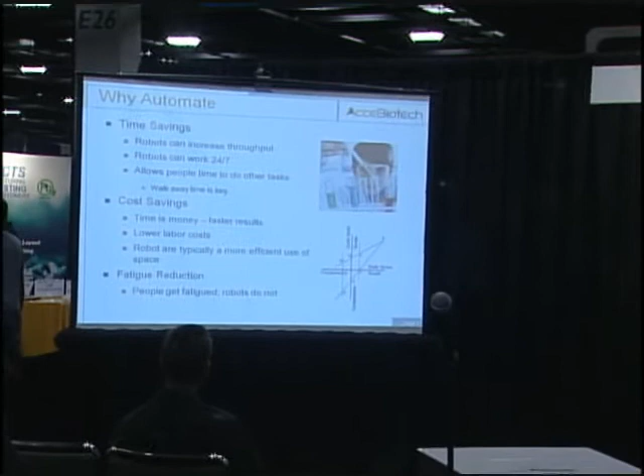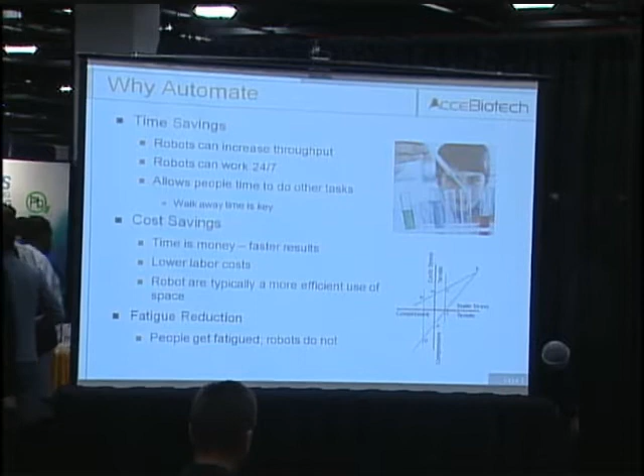And then in some areas, especially in research and development, it enables you to do other tasks rather than just doing simple mundane things. Obviously, time is money, cost savings, like I said. And then also the space. They're actually a very efficient use of space. They don't need a kitchen, they don't need a bathroom, and they can be very compact. In a lot of areas, fatigue reduction is a very important aspect of automation. We actually have one case example where that was one of the driving factors.

Another area is consistency and quality. If you want something that's very delicate, like injection into GC mass spectrometers, which used to be very delicate and user specific, if you want good consistency, sometimes robotics is very important. Also timing: in microplate dispensing, the timing of that process can be very critical, so automation can solve that problem. Dispensing of epoxies is another area. And then obviously special environments. You may be working in a biohazard lab or in a lab that has special chemicals, so a robot can also solve some of those problems.

So specifically talking about R&D, some of the types of robots that are used are typically Cartesian or SCARA robots. This is a picture up here of one of our robots, an XYZ robot. A SCARA robot works more like your arm, essentially a rotational, linear type application. There's also some high-end microplate automation that is really beneficial for high throughput screening or different types of chemistry applications. And this shows a Douglas system, which can run about 100 microplates a day.

So essentially, in R&D, you're typically using off-the-shelf automation. You're not customizing. You may have to customize a small amount because of the specialty of the application, but usually you're looking for a really quick return on investment, getting the automation in and running right away to help with your research and development. And you really don't want to spend a lot of time with custom equipment. So that's what we'll focus a little bit on today.

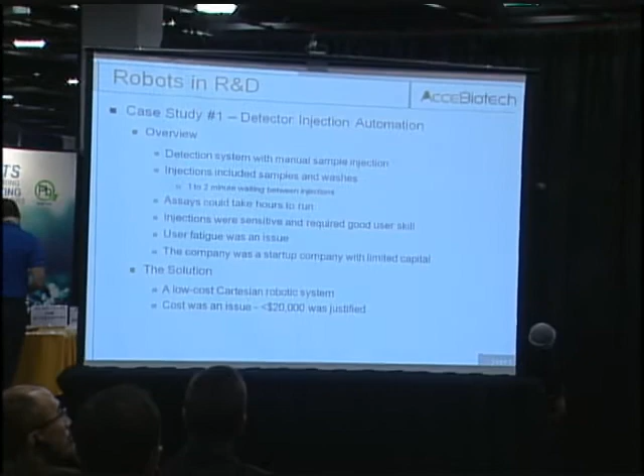So the first case study we have up here is a system used for detector injection. Basically this company was injecting a sample into a detector. And there were problems with that system in the sense that the injection samples were very time consuming, and they came at a frequency that wasn't easy for the user. Every 1 to 2 minutes you had to inject, and that timing was somewhat critical. So you'd stand around for 1 or 2 minutes and then inject, and then stand around for 1 or 2 minutes and inject. So you wasted a lot of time.

And because it was tedious to do, automation was a great possible solution. The only thing is the company had a limited amount of capital. They didn't want to go out and spend $60,000, and it really didn't pay back. So what we ended up doing is coming up with a low-cost Cartesian robot. How we were able to accomplish that is we bought a used Biotech system, which is a standard microplate robot, up here in the right-hand corner. And essentially we did some simple modifications to allow the upfront automation.

And you know, the system was purchased for $3,000 on eBay. If you were to go out to buy a new one, it'd probably be $40,000 to $60,000. But it worked out really nice because we were able to get the system in real quick, get it up and running, and get the simple process automated.

So the outcome is basically the assays are being performed by the machine rather than the scientist. So the scientist is able to do a lot of analysis and other higher level work, while the automation is done by the robot. The actual results are more accurate or consistent. The timing is pretty much precise. And then the interface to the injection system is also controlled, so they're getting a lot better results.

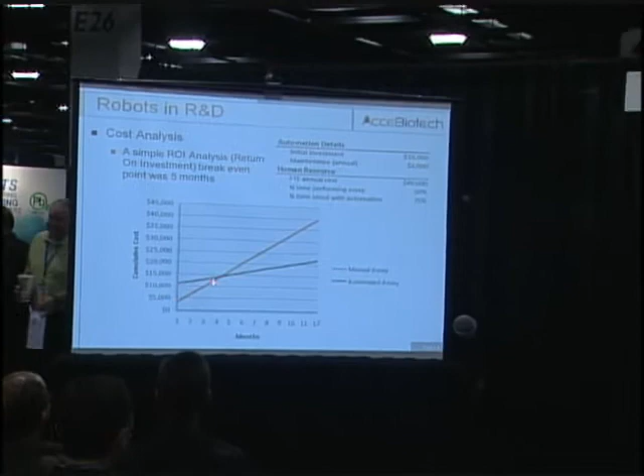So if you plot over time, this being months, the black line essentially is the initial investment of $12,000, but the amount of expenditure every month was reduced because less labor was used for that test. Essentially, this line here is just without automation, so every month you keep paying more and more for this person to continue to do the experimentation. So the crossover point ends up being about 5 months, so it was a pretty quick payback.

Now, if you ended up spending $60,000 up front, the payback would be way out here. It may not pay off, but using this creative solution of actually buying something off the internet and getting it up and going was a real good way for somebody to get up to speed.

So some of the creative approaches that you can use in R&D: one thing is I'm a real big fan of Craigslist and eBay. Like I said, we bought that robot there. When you buy a complex robot, there's usually sometimes a month or 2 month delay. With eBay, you can get it in a week or so.

Now, there is a risk that it may not work, but you also have the risk if you buy a really expensive robot and try and automate your R&D process, it still may not work. So with the small investment that you have, I think it's worth taking the risk. And there's a lot of vendors that are very established on eBay that will guarantee it. So it actually is a pretty safe risk.

The other thing is used equipment dealers. You know, I work in the San Jose area, so there's a lot of used equipment dealers there. They will actually let you demo the unit, test it to see if it works in your application before you buy it. So it's actually a very good approach if you're in that area.

And then think outside the box. I think this is a great show because it does have a lot of other kinds of technologies like the aerospace upstairs, but semiconductor capital equipment can be a good way of finding other types of automation equipment that may be specialized for your type of R&D problem.

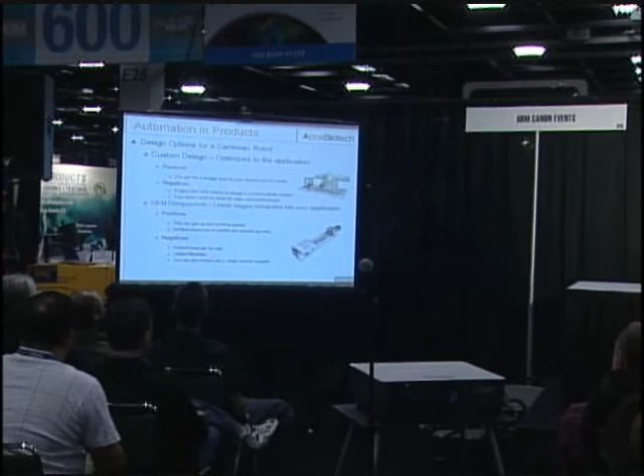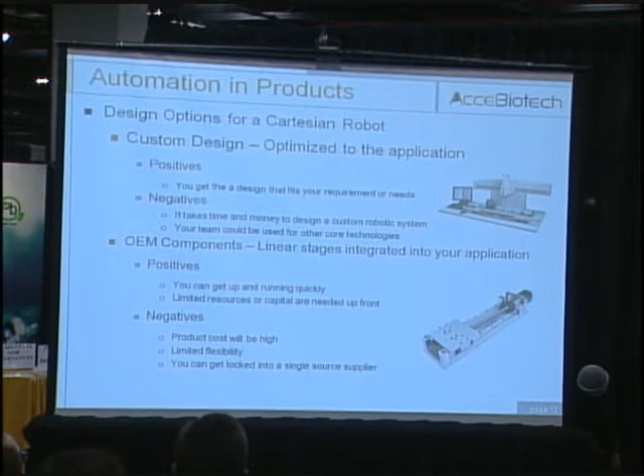So Cartesian robots are used quite a bit in automation of custom products or in diagnostic products, so we took that as a little bit of a case example. Like I said, custom designs are used quite a bit. That's an example of a diagnostic instrument off the right. The positives with that are that you get exactly or at least close to what you want as far as performance, costs, and so forth. The negatives are it does take time and money to develop that robotic system, and your team may be better off used in core technology or proprietary technologies rather than reinventing the wheel.

OEM components, you can buy linear stages and put those together, but those have a tendency to be costly, even though it does save you time and money up front. In the long run, the product's going to be probably a little bit more expensive than it needs to be, but that may be the correct solution anyway.

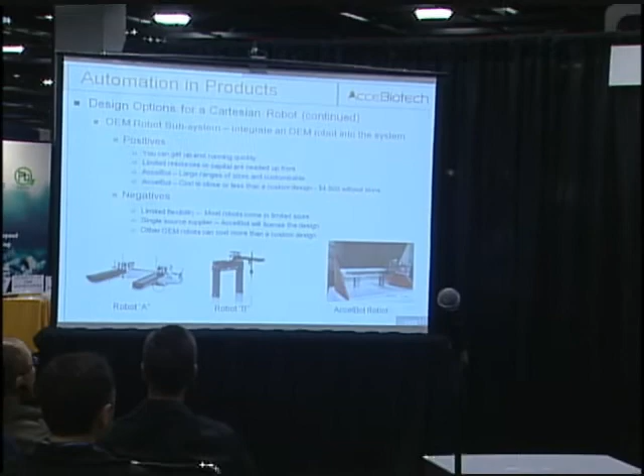The other option is to use an OEM robotic subsystem and integrate that OEM system into your system. And the positives there are you can be up and running pretty quickly. Limited resources or capital are required up front. And our robot is one example where we can actually scale it and make it fit your application at a reasonable cost. There are other vendors out there.

The negatives that can come into play are the limited flexibility. Some of the OEM vendors only sell certain sizes, so you have to be careful of that. And also, you might run into a single source situation where you are only able to get that from one supplier. That could be a problem too. And also, other OEM robots can cost maybe a little bit more, so you really have to evaluate whether or not you have the right solution for your product.

Creative approaches for automation and products. Again, I love eBay and Craigslist and so forth. The one thing there is to actually use that to look at other products where it's been done before. I worked a lot on immunoassay diagnostic systems, and now I'm working a lot more on DNA type systems, but a lot of those old immunoanalyzer systems had a lot of neat technology in them, and you can buy them for a fraction of the cost, bring them in-house, take them apart, understand what they're doing and learn from those devices.

For example, the Abaxis Piccolo up there was a really trendy product 20 years ago. You can buy it online for a few thousand dollars, and there's a lot of neat technology that you can learn from.

Patents are also another really good way to get up to speed. If you're new in the area and you want to look at what other people have done in similar market areas, you can get online with Google real quick and find out what other people have patented. It may not be the same technology they're working on, but at least you can use ideas from other people's test devices or commercial products and learn from those.

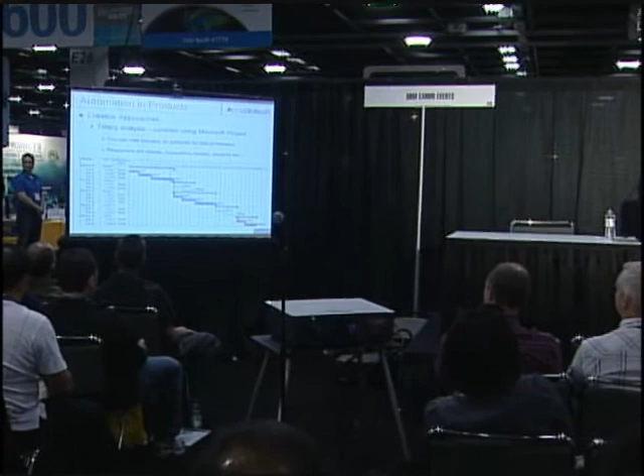The other thing on a commercial analyzer, where you have a process or a protocol, and this can be adapted to almost any phase of the development program or even production, is using Microsoft Project as a timing diagram. You can spend a lot of money and get a custom timing program, but if you use Microsoft Project and use minutes for seconds, you can actually analyze a fairly complex analyzer and the timing diagram for that.

It gives you the ability to size and scale the device in a creative way without a lot of investment, a lot of time. For this example, the robot is in blue and it's a resource like a human being. You just put it in there as the robot as the resource. So you can do resource leveling, you can do critical path analysis, with which you can optimize the throughput, and then you can scale it and change it around and see what the final analysis is.

So it's a really great way. I actually did this for a project when I was working with Roche, and they used this really fancy timing program, and they ended up adopting this in their system.

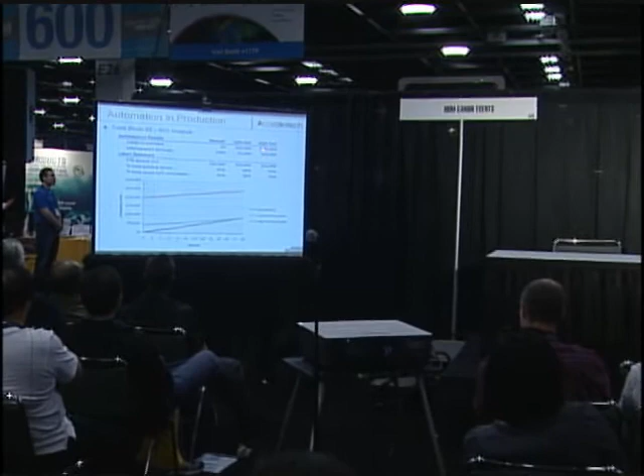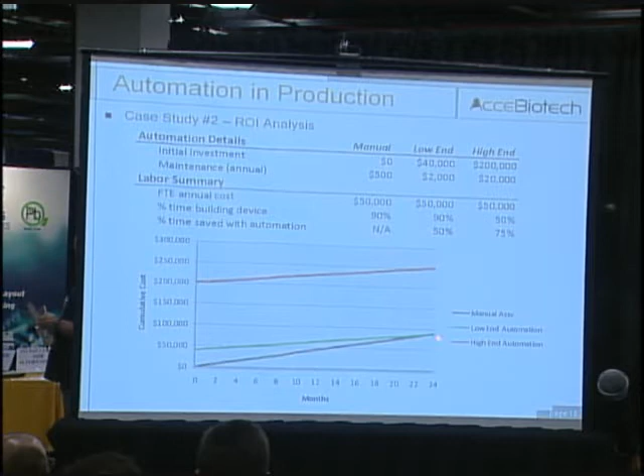And essentially we did a similar type ROI analysis, return on investment analysis, where we looked at the investment. The low end was just doing a couple stations at about $40,000. The high end was a couple $100,000. And if you really looked at the amount of savings of time, there was really one person that was actually running the operations, and when you added the automation, you'd still need that one person. So if you ran the numbers, it turned out it was 24 months before the low-end automation would ever pay back, and it took years probably for the high-end automation.

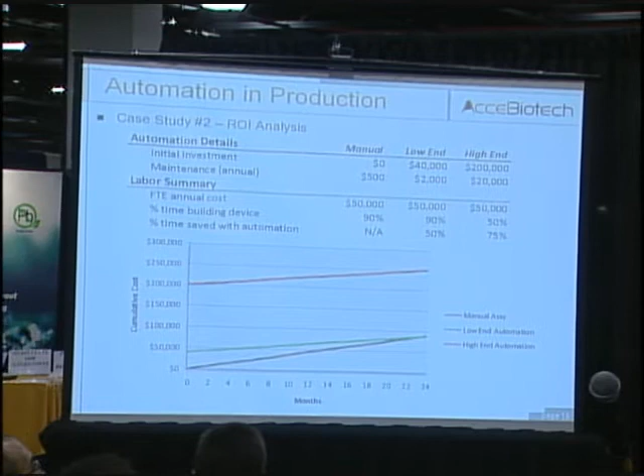So we said to these guys, I don't really know right now if you should be doing any automation. They were really gung-ho about trying to save money, but based on the volume that they had, they weren't going to save any money. So with this simple analysis, it was pretty clear that they shouldn't invest a lot of money in automation. What they should do is invest money in other areas.

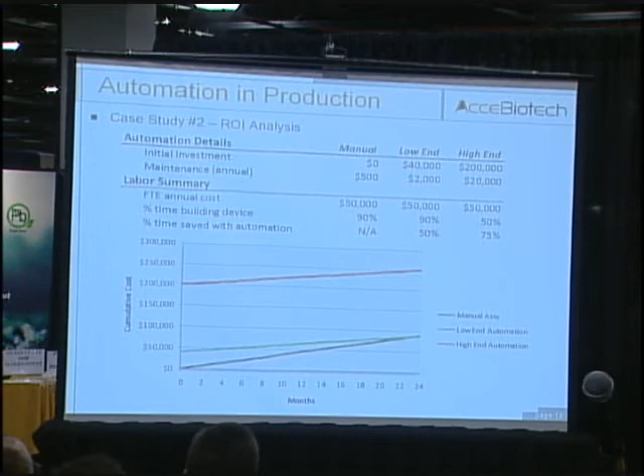So the outcome was it would take 2 years for payback. The best area for them to save money was actually their cost of materials, reducing the material cost by going to molded components or combining or outsourcing, so they didn't have to spend any more money on automation but spend money in other areas. And the recommendation is to wait until sales increase before adding automation, because it doesn't always pay.

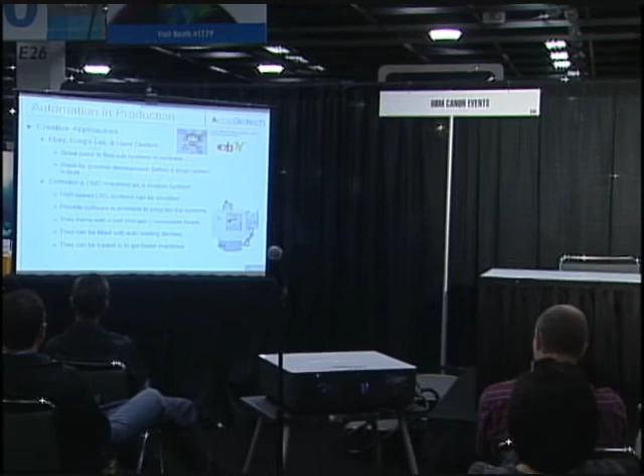So some creative approaches. Again, I come back to the eBay thing, like bowl feeders, all these special pieces of equipment. It may not be a bad idea, even if you're not going to use it in the final production version, to buy some components, play with it, test it to make sure it works okay, then order the exact piece of equipment. We've done that with ultrasonic welding equipment. Buy a used one first, get the application running, use that older system as a backup, and then buy a new system from Branson that fits your application and use that as your primary one.

Also, one trick is using the CNC machine. We have a fair number of CNCs in our facilities. They're actually very cheap. That mini mill is about $45,000. And I've seen people adapt those. We actually use ours for an optical inspection system, and we put different mounts on it.

So if you have a really special, hyper-precise automation process, sometimes it may be better to actually just modify one of those, and that can actually be used to help you get through those early stages. And/or I've heard of people modifying hundreds of these things for a specialty automation process.

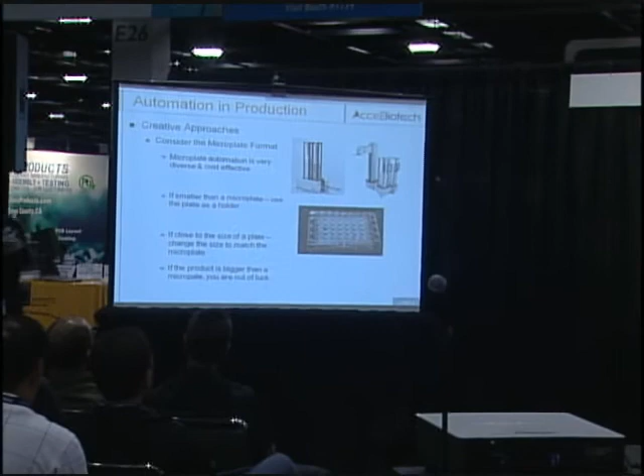The other thing that we like to do, I'm not sure if you're familiar with the microplate format, but for diagnostics, it's a very common platform. And there's a lot of automation equipment; like this is a stacker. Here's a rotary arm system, and the microplates are in here. And basically, for a fairly low amount of money, you can get very high-end automation solutions without a custom application. So we've been able to recommend to customers that they use a microplate format.

So if you're filling maybe little syringes or reagent packs or any kind of thing for a medical device, where you can fit that into this about 3x4 square area and put little receivers there, you can take the benefit of all these pre-designed pieces of equipment to move these little trays around with the small components in there. And then really what you have to do is make the individual process steps that are specific to that application.

And for microplates, they do a lot of automated filling stations, so you actually can buy that as an off-the-shelf component rather than customize it yourself. So it really gives you the ability to get a lot of automation and do it quickly without a huge investment and do it in a step-by-step fashion.

Obviously, if the product is close to the size of a microplate... we were doing a DNA reader for biodefense, and their cassette was about the same size but not the same size. And they came to us and said, hey, we want to do automation of the loading of the cassette. And I said, well, if you just change the size of your cassette, you could buy an automated loader for about $10,000 and your design is done.

I kind of cut myself out of a lot of business because we could have designed something custom for them, but it was a real enlightening thing for them, and they changed the design, and actually that's what they used for their front-end loading. Obviously, if your product's bigger than that, you're kind of out of luck, but it's a really cool product area that you can use for either production and/or obviously for diagnostics too.

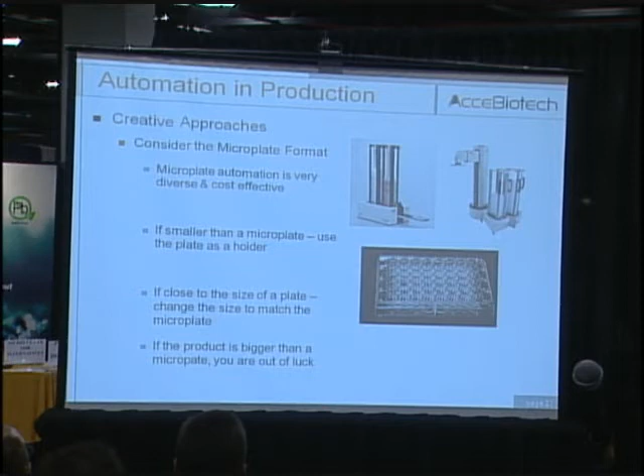So when do you want to automate? And so basically what we like to do is come up with multiple scenarios. We've just shown 3 here, but you may want to do multiple scenarios if you're looking at it. And this can be used not only in research and development for finding out whether you're going to save labor time and get more testing or more experimentation done in the development process. It can be used, as you can see earlier on, for products that have automation in them, or it can be used for production automation.

So basically, you're usually trying to come up with a baseline, which might be manual. It might be manual assembly steps. Another scenario would be partially automated, and maybe the third scenario or multiple scenarios would be full automation. So you've got to have a flow process in place. You understand or at least estimate the time per step, and if you're doing it manually, obviously you take that as a baseline. You can calculate what you're doing right now.

Estimate the cost to implement each step of automation. So if it's a sealer station or whatever, you can either potentially find some equipment or just guesstimate about what it was going to cost, and then create a cost model.

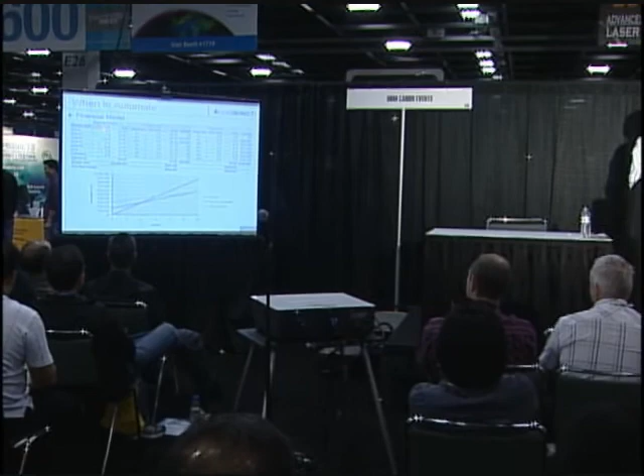So essentially this is the basic cost model, and over here are the different process steps. There's a setup time, which even in automation you have. There's different process steps, testing, packaging typically. So this is an example of just how much full-time employee time is spent on the individual steps. And what we did is just took an hourly rate, multiplied it by the time, and came up with a cost per step. For this thing, it's $18 to assemble this component. And I think this was based on 100,000 units, so every year you're spending $1.8 million in assembly labor.

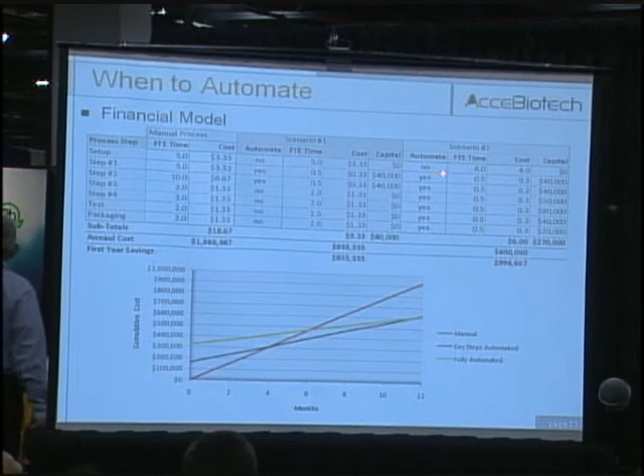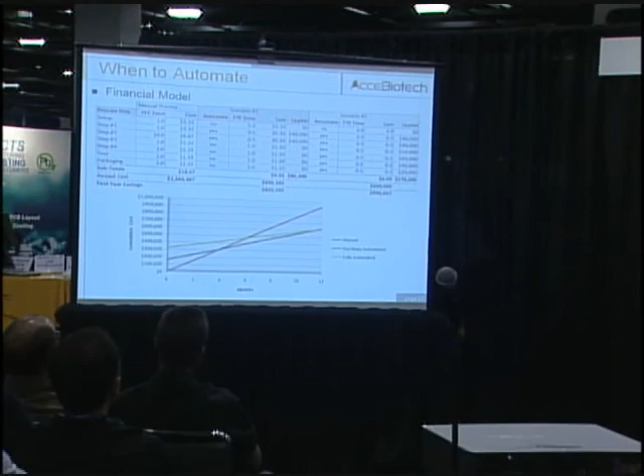The third scenario, basically we automated almost everything except for obviously the setup time. And there's a significant amount of capital for each of the steps, so maybe $250,000 of processing. And again, these numbers are all relative. If you use the same process for either a smaller or larger analysis, it still comes out the same.

So this is a graph again, and over a 12-month period, this red line is essentially the manual thing where you didn't spend any money. This is where the minimal amount of capital was spent, and the payback time is in about 4 months. So it definitely pays to go ahead and do these stations early on. And compared to that last example where it took years to pay off, this was a good payback model. And then the automation takes about 6 months. So this probably would be worth it to go to the $250,000 of tooling. It depends on if you want to spend that capital early or later, and maybe a staged approach is also better.

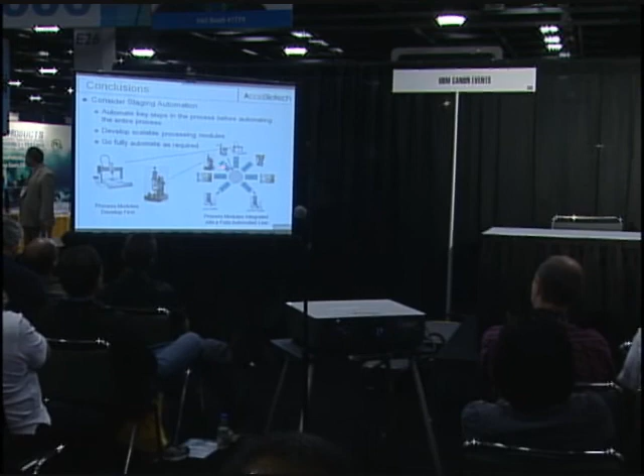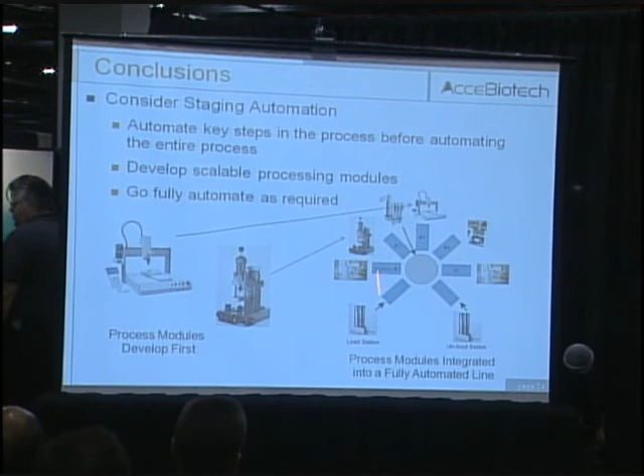So the next slide starts getting into the conclusions, and one thing I always like to do is consider staging the automation, whether it's in the development process or in the production process, and look at your key steps. For example, this is a rotary processing station using microplates. So you had a loader here, a SCARA robot in the middle that would move the disposable through multiple process steps. And to do this all at once might be a little bit aggressive. So work on some of the key process steps one at a time and get those optimized, and again tying that back to the return on investment analysis, those may be the more expensive or trickier steps. So focus on those first and then move into this later on once you get the individual steps or processes running.

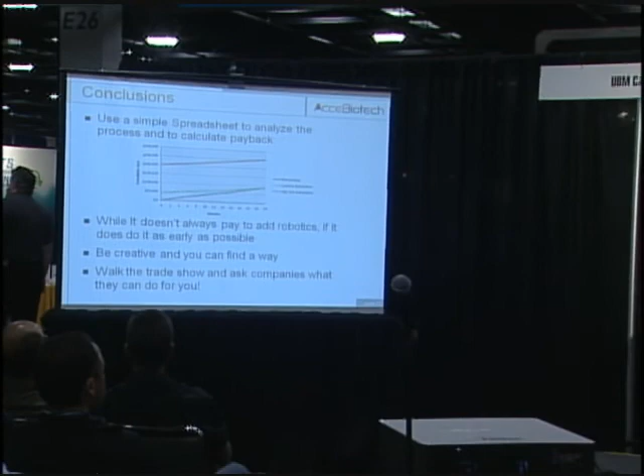So in general, I like to use a spreadsheet to analyze the process and the payback. You can do that in a day or two and really get an idea of how much automation is going to make you successful and what the best automation approach is. And it doesn't always pay back to do automation, as you can see in the first case studies. So a lot of people assume it, and it may not be the case, or you have to be smart in how you stage it.

I think the other thing is be creative, and you can find a way by using some of the ideas of eBay, used equipment, patents, and so forth. Just think outside the box. And then obviously the show is a great show. Go around and talk to people and find out what they have to offer. And most of the time they're ready to help you for free. So it's a good way of learning about automation.